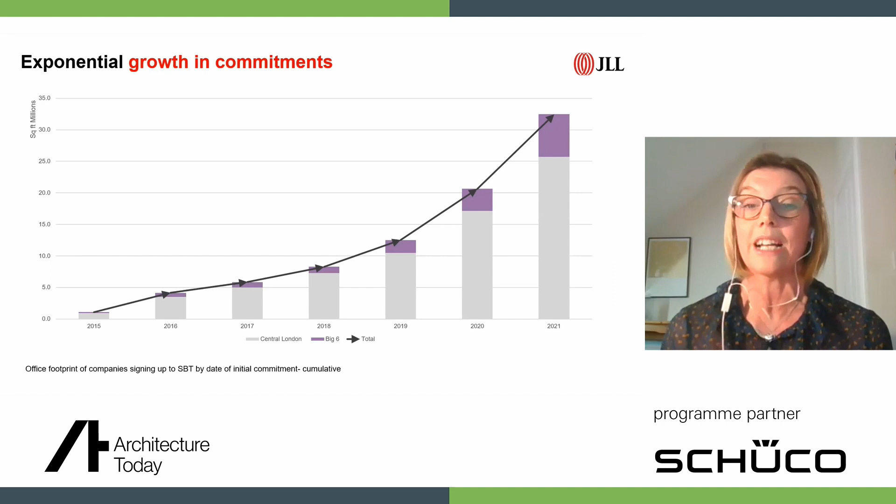And each of those companies obviously has a different time frame, but a lot of those companies have a 2030 ambition. So what that means is those companies actually have to take action now. When we look at the footprint of those companies, most have a lease expiry between now and 2030. What this means in real terms is that property teams in those companies will be thinking about the implications of their sustainability ambitions that need to be taken over the next few years.

And when we looked at those companies who'd already signed up to science-based targets, over half have also declared ambitions for their business to be net zero carbon, for example. So this places more pressure on the real estate team to help deliver those ambitions. So the real estate teams will be putting together a plan for their estates and looking at the additional investment needed to deliver on this.

We've done some analysis on their footprint, and you can see from the graph that of the current buildings those companies occupy, only 43% of space is currently in assets rated BREEAM outstanding or excellent. Anything below that is unlikely to meet the wider corporate needs. This suggests that leasing a more sustainable or higher rated BREEAM building, or a net zero carbon office, will be one way for real estate teams to help their companies achieve ambitious sustainability targets.

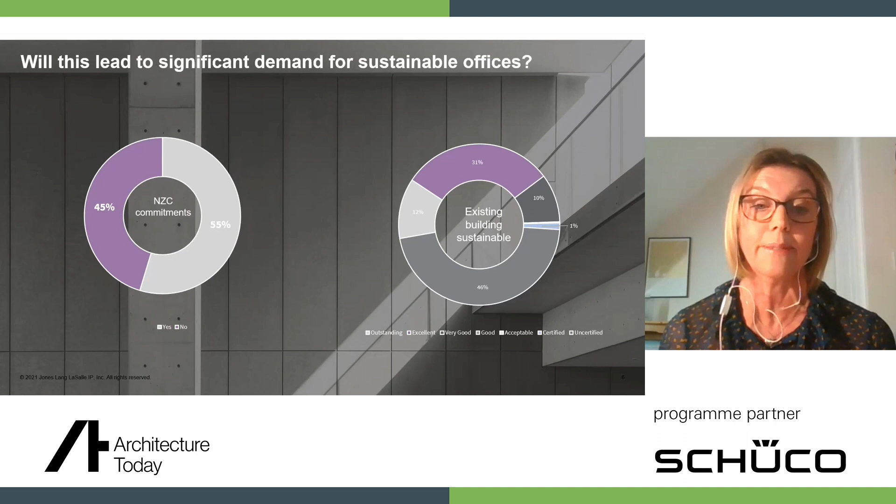Let's move on and consider the actual supply of sustainable office buildings. We're aware there's a plethora of sustainability rating systems in operation, but for this analysis we're just looking at BREEAM rated buildings. We've used data from the BRE, the Building Research Establishment, and estimate that just over 10% of the built office stock in the Big Six and Central London has a good to outstanding BREEAM rating.

Few buildings are now completed without a BREEAM rating, but to date few landlords have actually pushed on to achieve that top rating, with only a handful of outstanding assets available in these cities. These are illustrated on the right-hand side of the screen.

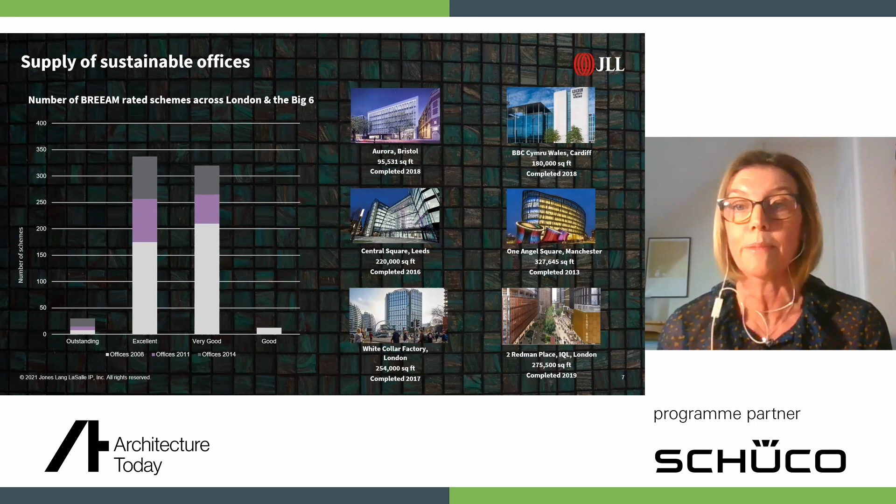As you can see from the graph on the left-hand side, most schemes have actually gained excellent classifications, and that's been pushed now through local planning guidelines, which set minimum BREEAM ratings for new developments in their markets. So about half of buildings in Central London and the Big Six have achieved an excellent rating. Although it's important to note that half are actually assessed under the 2008 rating system, so they're not directly comparable to buildings assessed much later. That's a really important point to bear in mind.

But of course, the next wave of sustainable buildings is going to go beyond BREEAM and will be targeting net zero carbon. Net zero carbon is an umbrella term often used in relation to the built environment, and it's essentially a framework to achieve that ambition.

Momentum is building to reduce carbon within the built environment, and we've seen several assets staking a claim to be net zero carbon in operation. But the challenge to reduce embodied carbon to zero is much more difficult. However, it's a challenge that must be met, given that in a typical new office building the structure can represent over 50% of the initial embodied carbon, according to the UK Green Building Council.

There are only a handful of net zero carbon buildings currently built, including 100 Liverpool Street and 80 Charlotte Street in London. And there are currently no net zero carbon buildings fully available which meet the UK Green Building Council's framework for both embodied and operational carbon.

There are several net zero carbon buildings currently underway, such as EQ in Bristol, Wellington Place in Leeds, and the Forge in central London. Developers are now starting to wake up to this opportunity, taking their commitments to more sustainable real estate much more seriously. But these buildings will take some time to come to market, and with momentum building around demand for net zero carbon, there's a real clear gap between demand and supply.

But how do sustainable buildings perform? We know from talking to developers and investors that increased upfront costs can often act as a barrier to the delivery of sustainable office buildings. But when we look at global studies, they tend to show that sustainable buildings have higher rents, quicker leasing, and better longer-term performance than less sustainable buildings. So we set out to consider whether that trend was evident across the UK.

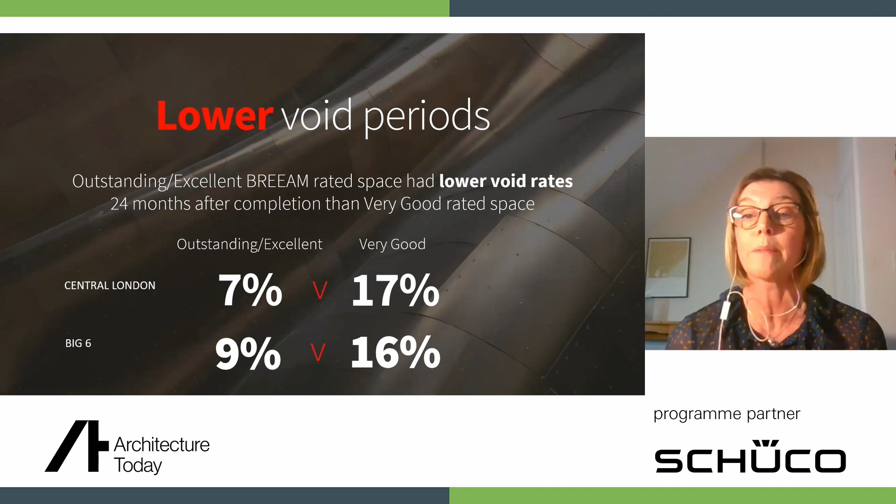I think it's also worth noting that many of these factors are already taken into account in sustainability ratings. And we fully expect that there will be an increasing prevalence of corporate mandates towards sustainability, and BREEAM is going to become a much more prominent deciding factor over the next few years. But we're also going to see other accreditations rise up the corporate agenda, and we'll see more and more developments targeting schemes such as NABERS, WELL, as well as obviously striving to be net zero carbon.

This focus on BREEAM ratings is borne out by another survey that we did. It's called our Responsible Enterprise Survey. And that showed that of the occupiers that we interviewed, 45% already prioritised building credential certifications. And another 40% expect to implement this by 2025.

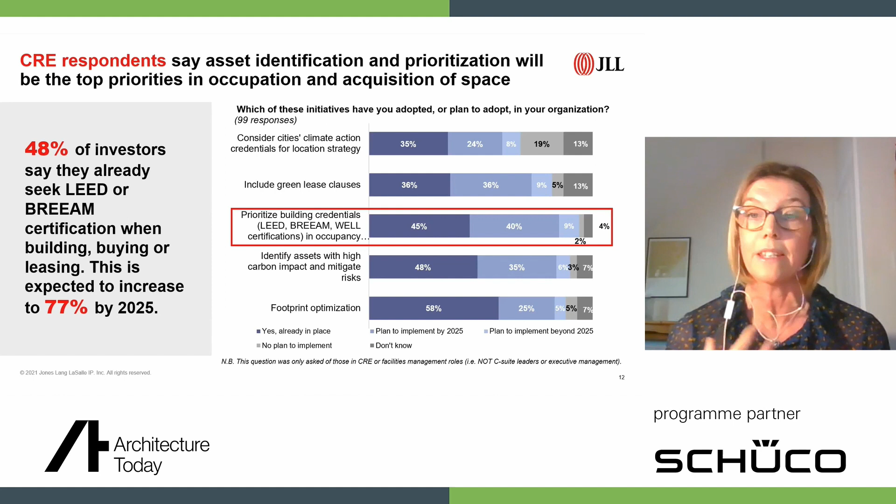The slide also shows the investor focus on sustainability certification. And again, you can see on the left-hand side of the screen, 48% of investors that we interviewed said that they already seek LEED or BREEAM certification when they're looking at building or buying a new office development. And again, you can see that the pace of change is expected to increase significantly by 2025.

The increasing focus for investors is really being borne out from a practical level. And we've also seen that through a number of the other surveys that we've conducted. We do an annual investor survey, and 2 years ago, we asked the question, what are the long-term trends that will have the greatest impact on the UK real estate?

In 2019, it was really interesting that sustainability was actually at the bottom of the list, with only 7% of respondents including it. Fast forward just 12 months to 2020, and sustainability had moved to the top of the list, with 70% of respondents including it. That's a dramatic increase in just one year.

So what we're seeing is that investors are clearly starting to recognise the potential impact on their portfolios from sustainability. This is also clearly illustrated by the latest survey we did, shown on screen. More than two-thirds of respondents said they will give sustainability a higher priority than they had over the last 12 months. Those institutions are focusing on 2030, not 2050, which is effectively just one property cycle away. That could mean we see many stranded assets within the next 10 years if they don't meet those sustainability criteria.

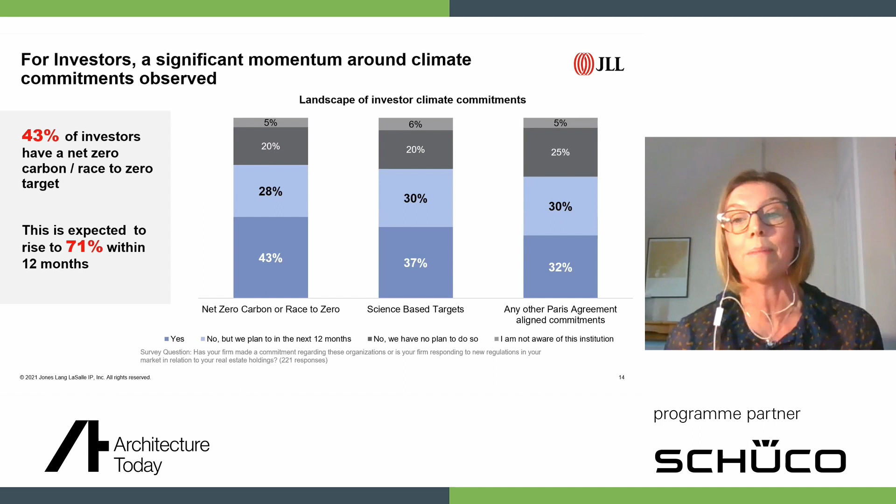Investors are also making commitments. What we're showing on screen is the number of investors that have made net zero carbon commitments, science-based targets, or other Paris-aligned commitments. We can see that at the moment, just under half, 43% of investors, have made that commitment to net zero carbon so far, and it's anticipated to reach over 70% in just 12 months. This shows the tremendous focus and momentum we're seeing in the marketplace, although commitments are the easiest part — following up is much more difficult to action.

So just to conclude and summarise, what I'd really like you to take away from the presentation today is: number one, let's be crystal clear that there is a real value differential in delivering sustainable office buildings. Number two, there really is a wave of occupiers ready and waiting for net zero carbon and more sustainable offices — occupiers who have big targets to meet and who are only going to get more demanding. Finally, we think there is a real premium opportunity for net zero carbon buildings if you move fast, but the conversation will increasingly move towards a brown discount as low performing buildings are increasingly rejected. I hope you found the presentation interesting, and thank you very much.

That was really interesting. We've had some questions coming in. One of them says many office buildings achieve the BREEAM Excellent rating — is that score sufficient to hit the UK net zero strategy targets?

The issue we have at the moment is that BREEAM is the only rating we do have. I think it goes a long way to focusing the industry's attention on sustainability targets, and it's something people understand. I think the problem with BREEAM ratings is that's just how buildings are designed — it doesn't necessarily translate into how buildings are actually occupied, and I think that's going to be one of the critical points moving forward for us to reach net zero carbon, actually how we use our buildings moving forward, which is why new ratings such as NABERS will be more relevant to the industry as we move forward.

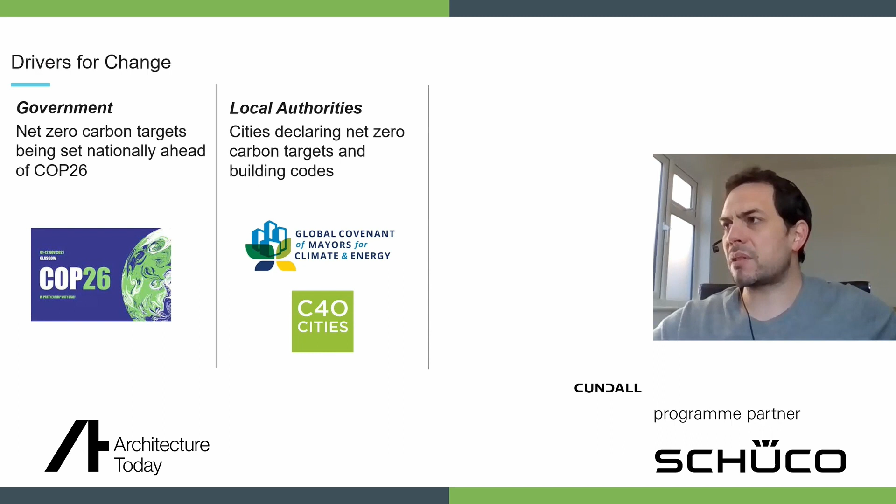Over the last couple of years, we've really seen a number of drivers for net zero carbon from central governments around the world, especially the UK, declaring a climate emergency back in 2019, followed by pretty much all local authorities declaring their own emergency and setting even more ambitious targets than the central government. Then there's been a significant groundswell of public action and media attention around net zero carbon, which was intensifying before COVID. We expected COVID to have a bit of an impact, but to be honest, the public response to the climate emergency has kept pace and has really been pushing central governments and organisations. So we're seeing huge drivers across different sectors and different areas for decarbonisation.

In terms of the built environment, we're seeing similar drivers for change from investors, developers and occupiers, working with a number of institutional landlords where occupiers are setting their own science-based targets and net zero carbon strategies, and saying that if the buildings do not meet their requirements and help them hit their targets, they will be moving. So there's huge pressure on landlords to decarbonise their assets or risk voids or reductions in rents.

Similarly, we've seen a huge movement with developers. Most developers have now committed to net zero carbon commitments via the World Green Building Council or Better Buildings Partnership. This requires them to achieve their net zero carbon standards in a certain period and produce roadmaps. The main reason they're doing this is partly because they want to and have their green aspirations, but similarly, funding is being heavily linked to ESG requirements and net zero carbon.

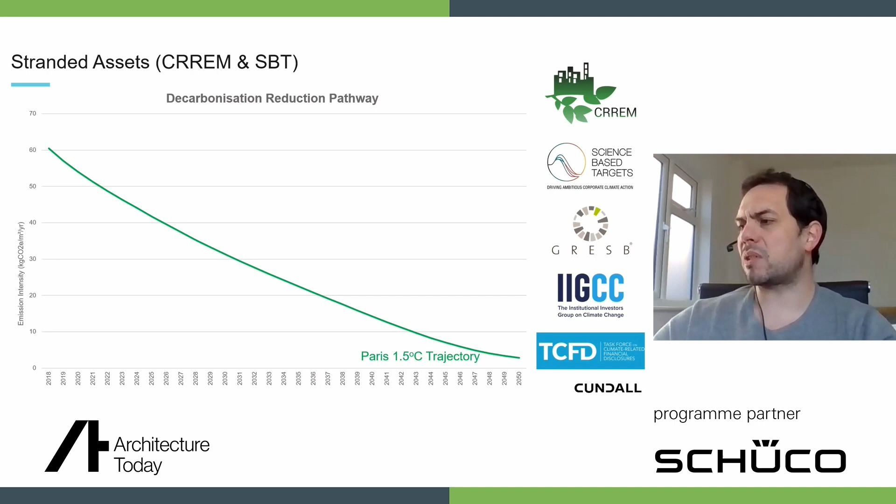A lot of investment organizations are mapping their assets against this CRREM trajectory, going through their entire portfolio to understand where their current performance is, which is generally for most newer buildings below that green line, the trajectory. But if they do nothing to that asset, it will eventually get to a point where it crosses the green line, which is known as a stranding event.

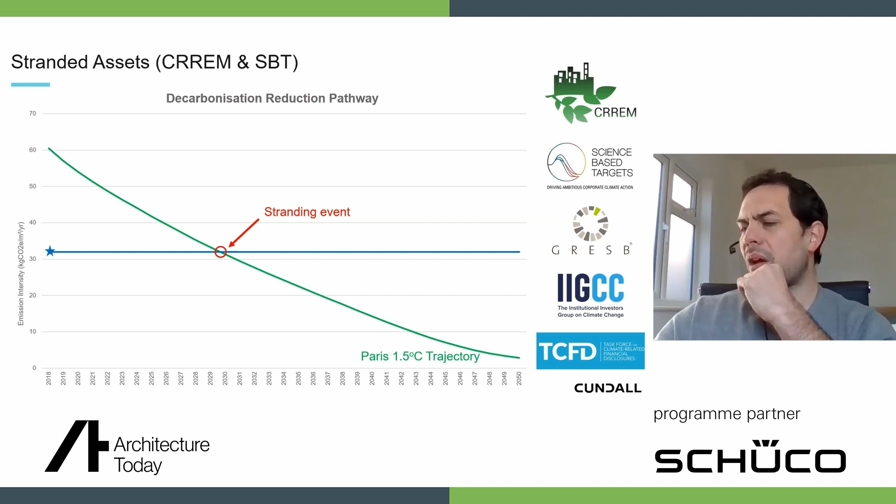This doesn't have any physical impact on the building, but what this is starting to do is put the asset at risk of devaluation. Large institutional investors are starting to look through that to see what retrofit and action is needed on assets and portfolios to reduce that stranding risk, or move that stranding risk out further, with the aim of ultimately aligning to a 1.5 degree trajectory.

They're doing this to future-proof themselves against potential carbon tax and levies, and also to meet their ESG requirements. There's no requirement to do it now, but a lot of organizations are doing it as part of their ESG, but also the main reason is to de-risk the financial implications that are likely to come from central governments, the European Union, and carbon taxes as they start to be introduced over the next few years.

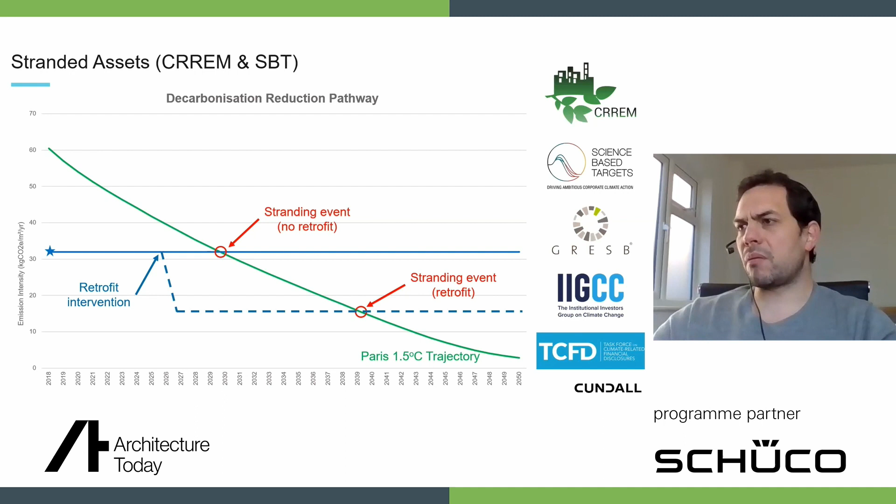So what does this mean for buildings? Well, the first thing we have to do is look at definitions, and net zero carbon buildings has really been accelerating in understanding and implementation over the last 2 years, and we've really started to see the industry come together and define what we mean by net zero carbon buildings.

One of the key differentiators from carbon neutral, which I think is pretty much standard now, is that there's a clear understanding that carbon neutral just means you work out your carbon emissions and offset down to zero with removals. There's no requirement to achieve any standard before you do those offsets, you can offset as much as you like, whereas net zero carbon requires you to align your emissions to a 1.5 degree scenario before you remove. So you need to hit stringent targets around operational energy and embodied carbon before you go to those removals.

Most developers and most of the industry are setting their targets and aspirations around net zero carbon. A few developers have actually gone a step further and are looking at absolute zero, meaning they're looking to get down to zero without removals, which is possible with things like operational energy at the moment with renewables, but for embodied carbon it means a complete shift in the supply chain and working with your supply chains. It's going to be extremely challenging, but extremely interesting how those developers get on with those targets.

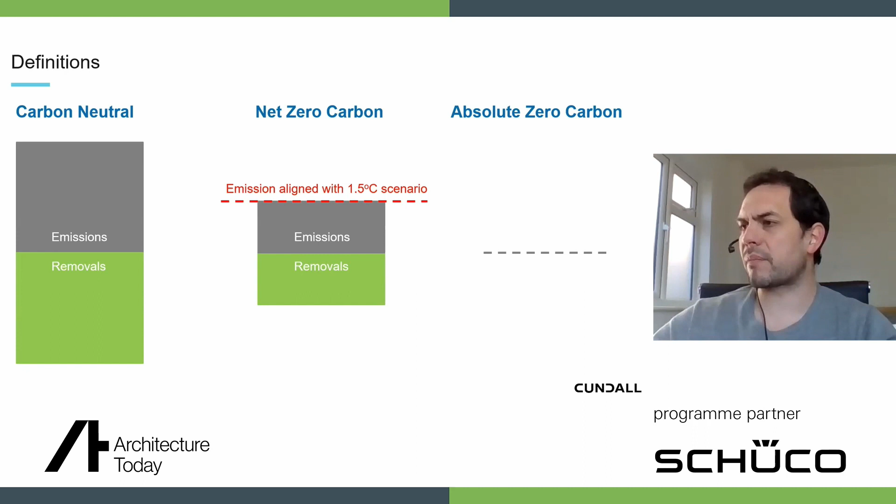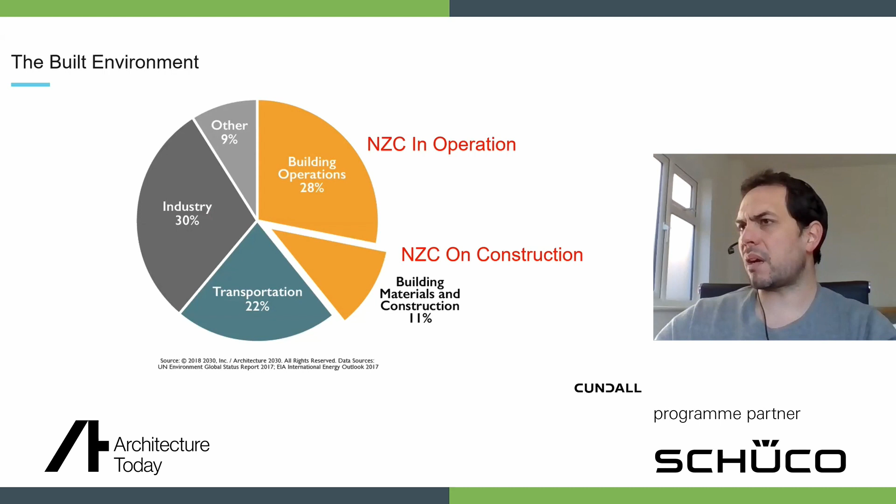So there's two key requirements when we're talking about the built environment: we have net zero carbon in operation, which is a significant proportion of the UK's emissions, and we also have net zero carbon in construction, which is rising in importance with the precedents and trying to get regulation on embodied carbon. Both of these over the last couple of years have had their definitions refined, and we now have clear definitions from the Whole Life Carbon Network, LETI, and the RIBA for both operational energy and embodied carbon.

So for operational energy, there are four main requirements. One is that no fossil fuels are used on site. Energy use is minimized in line with those Paris-proof targets. That meets local energy targets, which in the UK is generally UK GBC and LETI targets. And then all energy is generated from renewables, either on-site or off-site, using power purchase agreements and green tariffs, which again can be problematic.

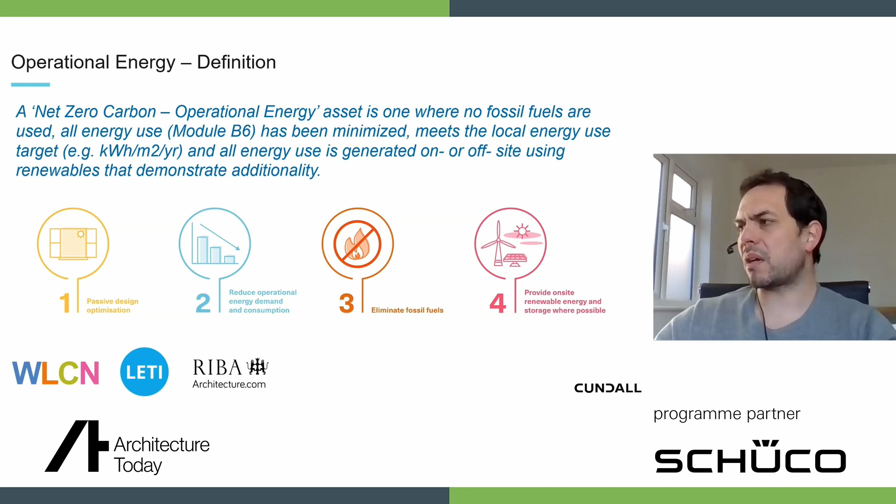In terms of net zero carbon on construction, the focus is on upfront embodied carbon. So it's about reducing the upfront embodied carbon associated with the construction, and then offsetting down to zero, but only once you've met the targets.

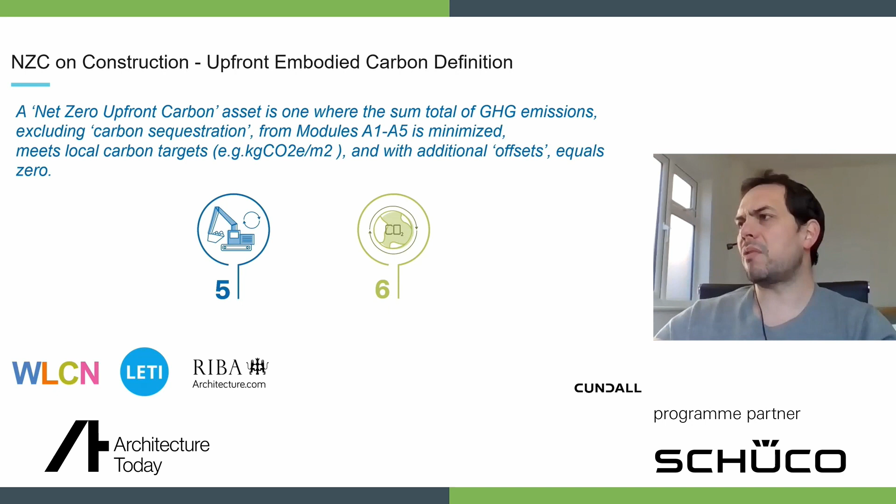So what we've seen a lot of schemes do is offset their carbon footprint of the upfront embodied carbon, but if they don't meet the intensity target, then they can't claim to be net zero carbon - they can only claim to be carbon neutral. This has to be considered in conjunction with whole life carbon, because we don't want to be making decisions which might be low embodied carbon on day one but have huge carbon implications later. So really trying to define the difference between upfront embodied carbon, which can be reported fairly accurately now on practical completion and is the focus of where we want to be going, but being mindful of whole life carbon and looking at calculations to achieve those kind of standards.

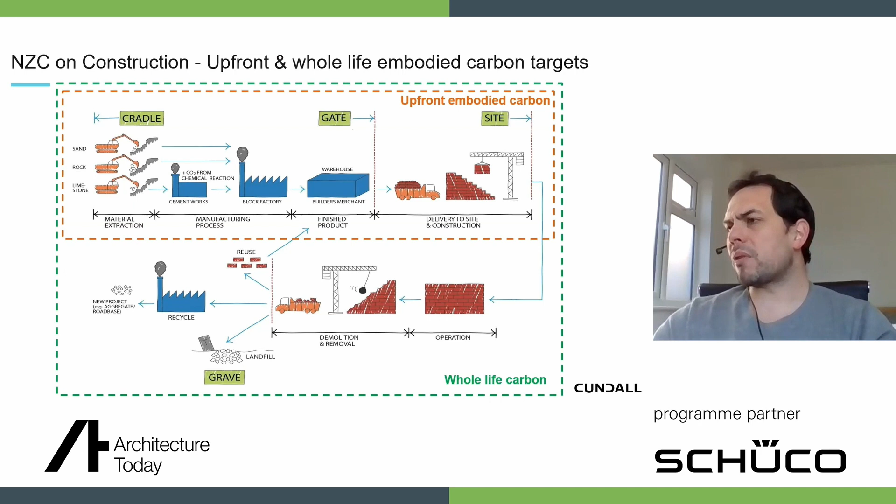What's recently been published and we've been involved in is a consistency project. So obviously over the last few years, we've seen LETI, the RIBA and a few others come out with carbon targets. They cover slightly different things, with LETI focusing on upfront embodied carbon and RIBA looking at whole life carbon. They've now been aligned and starting to put together sliding scales, like EPCs, of what is good and best practice.

A number of schemes are starting to report their carbon emissions against these, with the best kind of new build schemes generally achieving upfront embodied carbon around the CB band, which is extremely challenging, but it's going in the right way. To get to the LETI 2030 targets, we're only really seeing projects which are doing significant retrofit and refurbishment getting anywhere near those kind of levels.

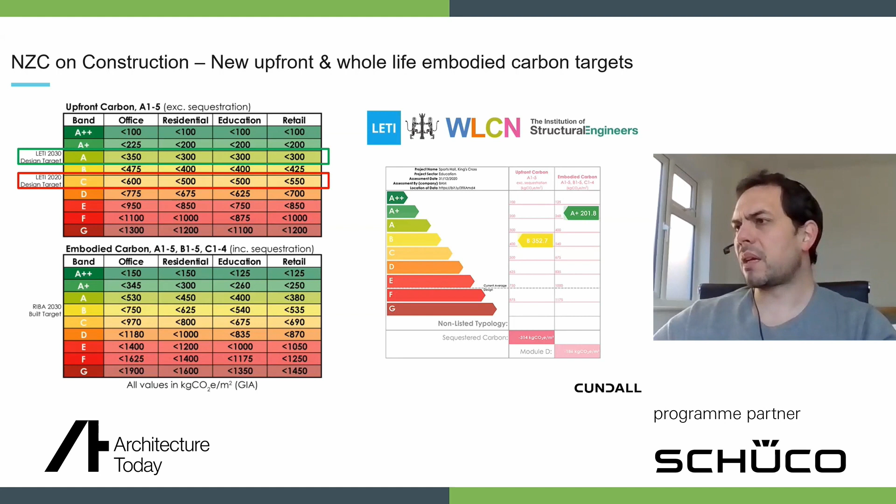In terms of operational energy, just looking at the commercial office sector, this is a good example which shows the level of reduction we need. So typical office buildings in the UK are at an energy intensity of around about 300 kilowatt hours, with the best practice 25% being closer to 200.

In order to get down to the Paris-proof aligned targets, we need to be closer to kind of 70 kilowatt hours per meter squared, which is a significant step change, and we need to push as hard as we can. It's not about tweaking and fine-tuning buildings, it's about systematic change in the way we design and operate those buildings going forward.

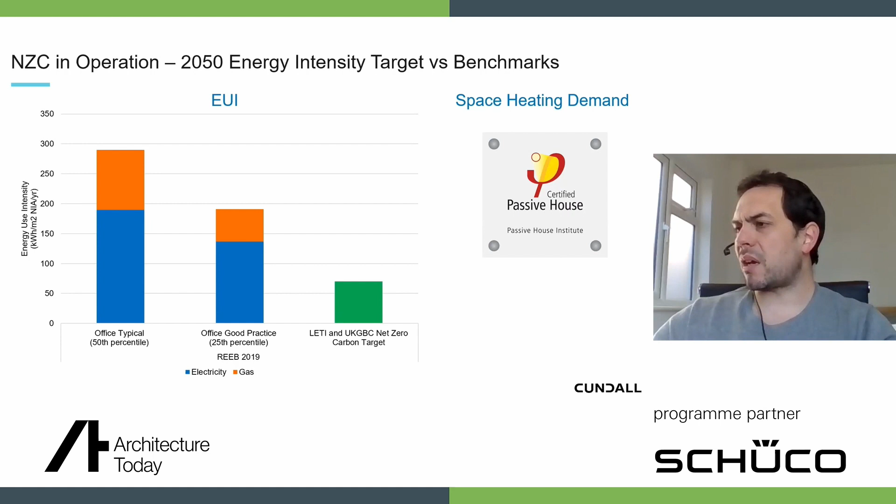To get us to those targets, the UK GBC and a number of other institutes have put together interim step targets. So you can see here from the UK GBC target for offices that we have whole building targets. They've broken that down into base building and tenant targets, and then set those every kind of 5 years, improving.

And pretty much all the buildings which you see in the media claiming to be net zero carbon in operation are hitting the interim targets. There's pretty much no buildings at the moment aligned to the Paris-proof targets. Most will be net zero carbon to a date.

So if you build a building that is net zero carbon meeting the 2030 targets in 2025, it's only going to be net zero carbon for 5 years, and it will only stay net zero carbon if retrofit works are actually completed.

So when you're designing a new building, we need to be getting as close to these Paris-proof targets as possible. And if we can't achieve the Paris-proof targets, we need to be setting a pathway so that it can be improved over time. That might be improving the ICT in the building, or tweaking some of the operational parameters, or changing our MEP after 5-10 years or longer.

This is linked to the Australian NABERS scheme, which has come over to the UK, with 6 stars being roughly equivalent to the Paris-aligned targets. And there aren't any buildings which at the moment are targeting or moving towards a 6-star. Most of the front-running buildings that we're looking at and reviewing are kind of around about the 5.5 star, and probably won't achieve that level of performance. Will probably be coming in closer to 4.5 star at absolute best. So we still have some work to do.

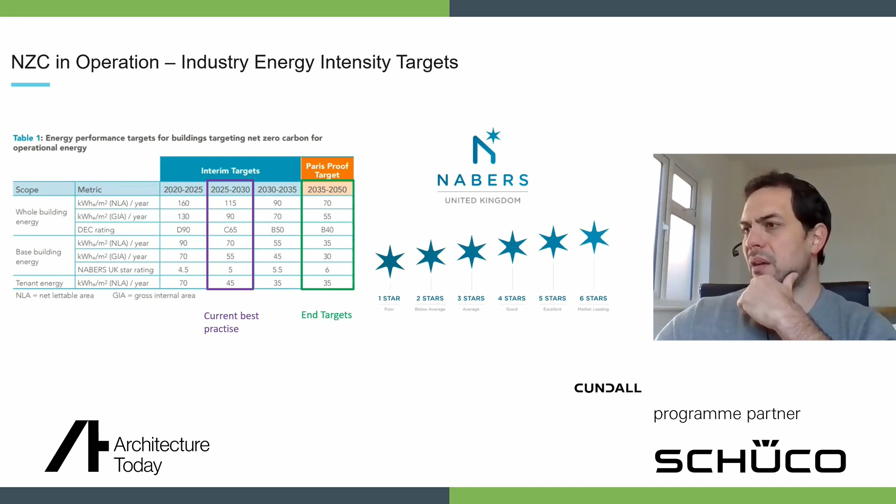What's very interesting about the step targets is if we go back to the CRREM trajectories we're talking about, what that basically means is if we aim for an interim target, we are still going to have a stranding point in the near future.

So the further we can go down that step trajectory, the stranding point will be pushed out, and the less retrofit work we have to do.

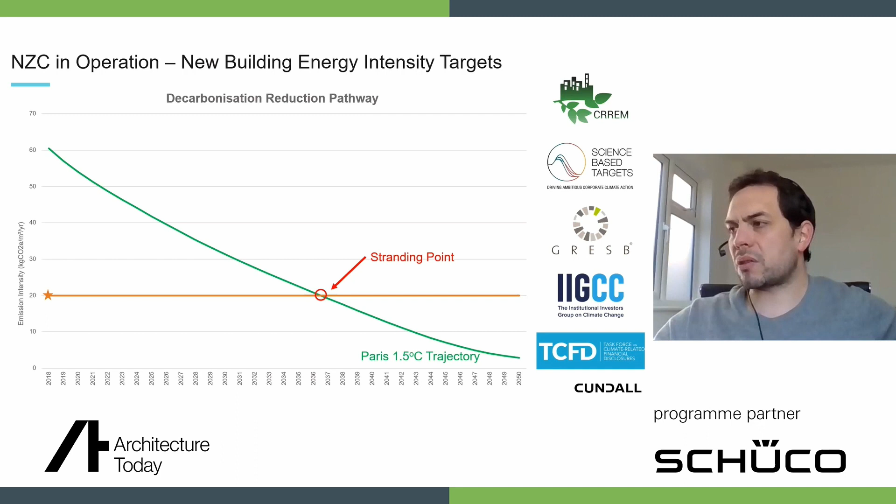One of the biggest discussions we have at the moment is the cost of net zero carbon. We know there is a premium for net zero carbon buildings. We've seen from the UK GBC reports that this can be between 5 to 15%, but you need to be careful when looking at that cost, because you need to compare the whole life cost, not just the upfront cost.

So if we take a building that we need to get to net zero carbon in operation, adding that 10 to 15% pushes the viability of the project. But if we don't do that uplift in the original cost, then we will need to do retrofit works to comply with stranding, because all buildings will need to be net zero carbon by 2050 to meet government targets. The cost of getting to net zero carbon will be significantly greater doing the works later than now, so you'll have increased operating costs and significant costs to pay.

What we recommend is that people really focus on the fabric, because you don't want to be recladding and scaffolding a new building only 10 to 15 years after it's built because you haven't gone hard enough on fabric performance. It's really important that you get the fabric right, and have a strategy around plant and equipment replacement, phased over a number of years. It's a false economy just calling it an uplift - that uplift needs to be balanced on a whole life assessment.

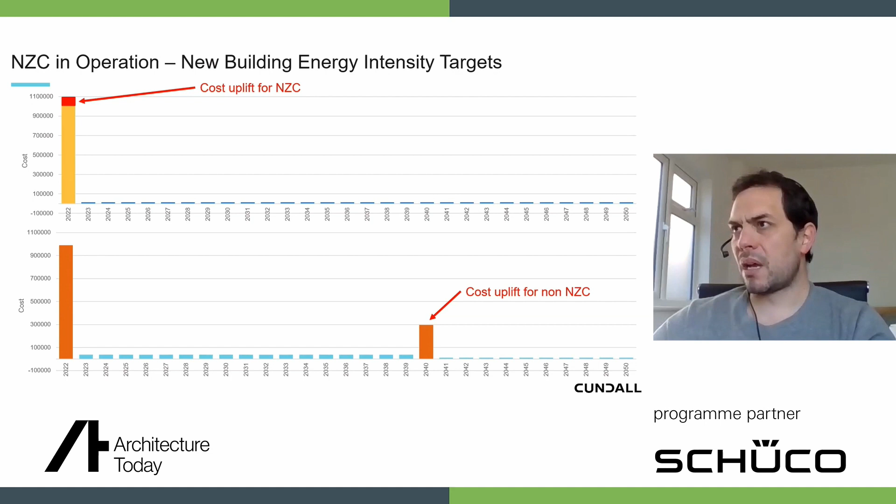Just to finish up with a few case studies. This is one project which has done that - the Eden project in Salford, Manchester, which is looking to be net zero carbon in operation. It's been designed to be NABERS 5.5 star, and is just going through the independent design review process at the moment, very close to the 2030 targets, with an aspiration that the fabric achieves near passive house standard.

So fabric changes won't be needed. The changes from moving to the 2030 targets to the 2035 targets will just be fine-tuning the operating conditions with the occupiers. So it will achieve very high standards and then have a pathway for moving to net zero carbon in the future.

It's not just being done at building level. This is another project we're working on in Salford, Manchester - a £2.5 billion redevelopment of Salford Crescent, where the master planner sets individual net zero carbon targets for individual plots and infrastructure, looking at both embodied carbon and operational energy. It's got a significant residential proportion using passive house.

One thing we're seeing on this, and across projects, is the effect on land prices. Where we're developing schemes with local authorities, land prices are being affected. Where they're setting ESG and net zero carbon requirements, the viability of schemes is under pressure, and that pressure is pushed through to the actual land value. Some local authorities have reduced land values significantly if schemes meet their ESG requirements, partly funding those requirements for the project.

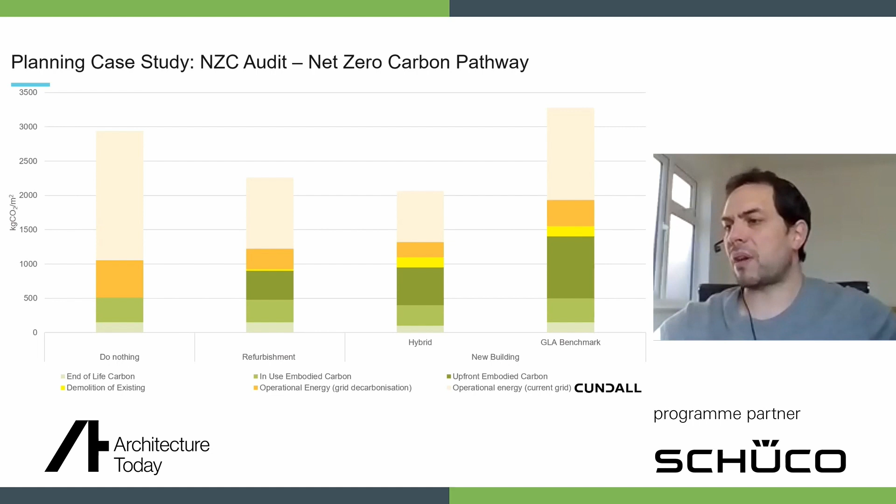Finally, and most importantly, is existing buildings. So existing buildings will make up 70 to 80% of the buildings that are operating in 2050. So we need a significant program of retrofit to existing buildings.

So we're going into quite a lot of buildings, looking at the existing performance, and then looking at where we want to get to in terms of net zero carbon performance.

Looking at a number of interventions like installing heat pumps, removing fossil fuels from the building, improving fabric, introducing mixed mode and natural ventilation solutions, improving the HVAC systems, and a significant proportion is associated with behaviour change.

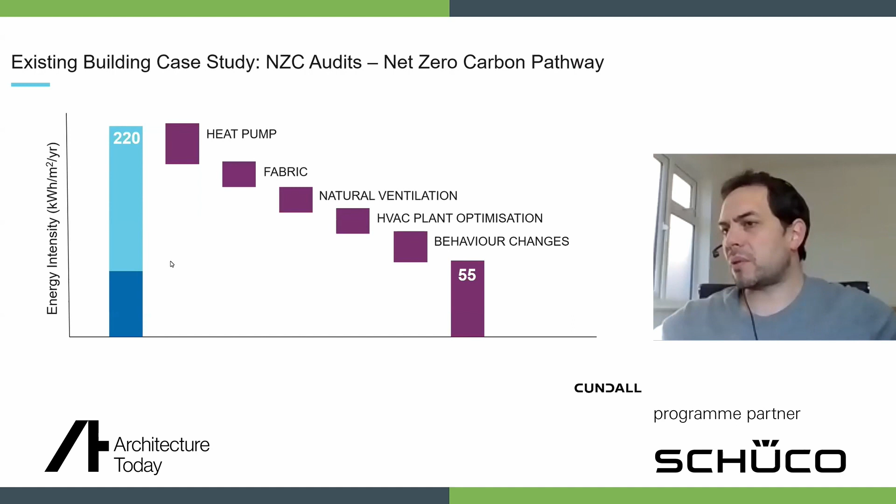Then what we're doing with those measures is mapping them onto the CRREM trajectory or a science-based target trajectory to see where the asset is, and then demonstrating through those interventions how we push out stranding events. So the risk of that asset devaluing or having void periods is reduced.

And what we're seeing from a lot of clients is when they're doing technical due diligence to acquire buildings, they're looking at stranding events, they're looking at the cost of moving those stranding events out and improving the building performance. So there is definitely the business case now coming through, both in terms of retrofit, acquiring buildings, but also in terms of planning and new buildings themselves.

So we're definitely seeing the market pressures around moving towards net zero carbon. So that's the end of my presentation. If you've got any questions, please let me know.

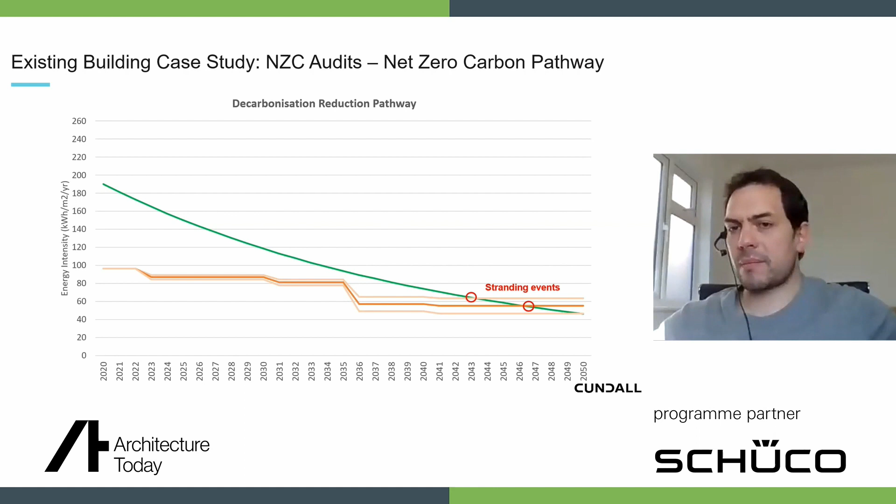I was really interested you talking about those graphs showing the way that stranding events were going to move, or wanted to move forward to be further away in time from where we are now. How much do you think that existing buildings will be stranded? Because don't regulations normally apply at any point to new build rather than to buildings that are already there?

Well, this is probably the most interesting shift change we're seeing. So, as you said, the building regulations, EPCs, BREEAM, all look at design and buildings on completion. So they're not very good measures of operational energy.

So what the government are looking at is mandatory energy performance of buildings. DEFRA have done some consultation on this. And what they're potentially looking to introduce is a mandatory reporting system like DECs, so every year you take your gas and electricity meters and then you'll basically report your performance.

They're looking at large commercial offices to start with, but they'll probably introduce it for most other types of buildings. What would be interesting is they'll start with every year you've got to disclose your performance, but they'll start putting that in a league table, and there'll be a point where they'll start introducing fines for being below a certain level. So they'll be looking at real life performance.

In reality, those fines would be fairly small. We've seen that with the other European Union energy directives, they're generally very small amounts. But what will happen is once there's a league table of office buildings, no developer, investor or landlord is going to want to have their buildings towards the bottom of that league table. So there'll be a competition to move their buildings up towards the top of those league tables.

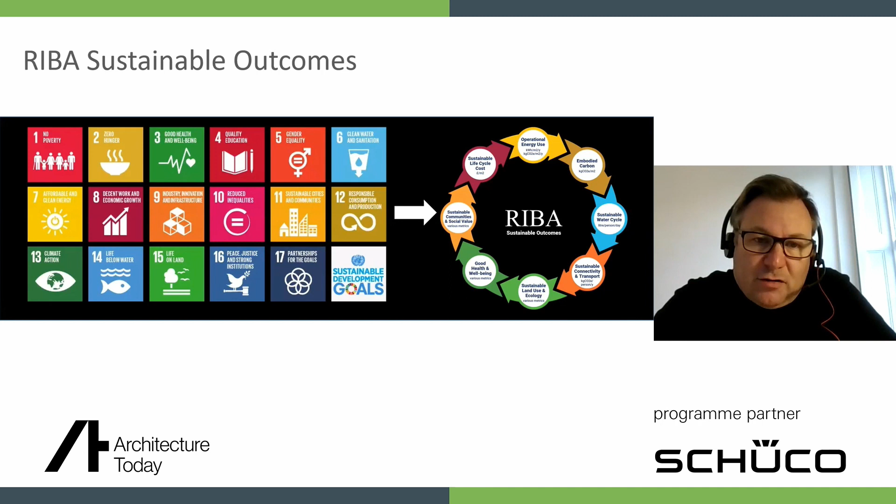All the latest RIBA guidance that's been released over the last couple of years embraces a whole life cycle model of sustainability. And equally, the guidance also aligns with the UN Sustainable Development Goals, all 17. But what we've done is distilled this down to 8 sustainable outcomes that we can measure and manage on a busy project with busy project teams.

So just taking a moment to go over those sustainable outcomes, we've got the 8 along the top there. We've got net zero carbon, which is operational, and then we've got net zero embodied carbon. Together they're considered the whole life net zero carbon.

Then we move on to the sustainable water cycle, sustainable connectivity and transport, sustainable land use and ecology, good health and well-being, sustainable communities and social value, which again we'll come back to later in this presentation. And then finally, we've got the sustainable life cycle cost, which is the subject of this talk. So we've got our 8 outcomes, which effectively is the DNA of a sustainable building.

But underneath that, we've created about 24 key metrics that one could measure and manage throughout a project. These are really up to the client and the design team to choose, and maybe add more depending on the type of project. But we feel this is the baseline for actually achieving a whole holistic sustainable outcome for the whole project.

So just taking it very quickly, I'm not going to go through everything, but looking at the key metrics, we're talking about a 60% reduction in operational energy use, which is part of the RIBA 2030 challenge. And then we offset that remaining operational emissions.

From an embodied carbon side, it's about retrofit first, and we try to aim for that 50% reduction in embodied carbon from benchmarks, and then we offset that 50%. Sustainable water cycle, again it's trying to aim for that 40% reduction, and those 3 together are really the RIBA 2030 challenge. Then moving on to sustainable connectivity and transport.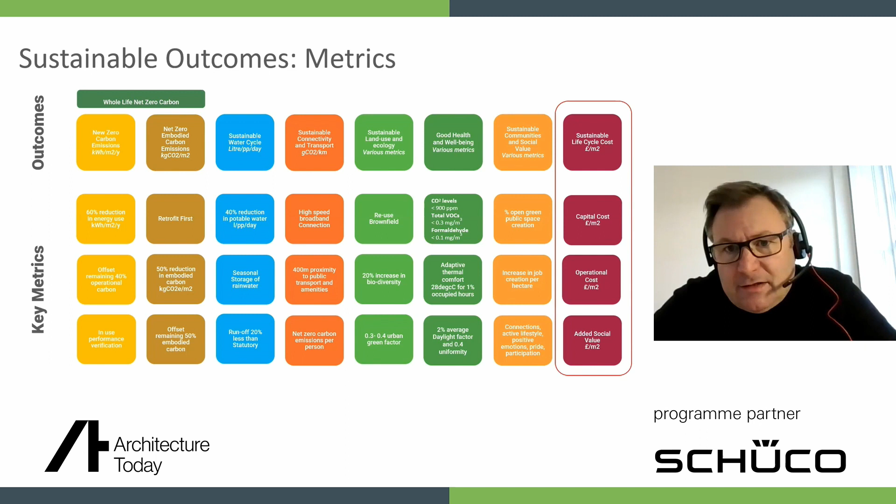And the final one, which we're going to talk about today, is this sustainable life cycle cost. So I'm going to move on to this.

What do we mean by sustainable whole life cost and value? The graphic on the left is really a business model for architecture and buildings. It's balancing cost and value, and obviously our clients are looking for more value than cost over the whole life of the project.

And effectively that's the same on this micro level. The question really is, can we afford to enhance our buildings to create better sustainable outcomes? What's the cost of that and what's the value?

So what we're looking at is the cost: the capital cost, the capex, and the opex, which is the operational cost of the facility. Then if you add all the operational savings in terms of energy and maintenance costs, plus the benefits of enhanced well-being and productivity of the inhabitants, as well as the rental premium, which we'll talk about later, and then add that wider social value on top, does that outweigh the balance of the cost? I believe it does, and we're going to talk about it in a minute.

Now the graph to the right is a seminal graph, back in 2005. I've been using it for 17 years, and I've been trying to get our cost consultant colleagues to redo this graph for 17 years, but we haven't really done it yet. So I think it's a challenge to anybody listening here to attempt this, and we need the evidence to support this work.

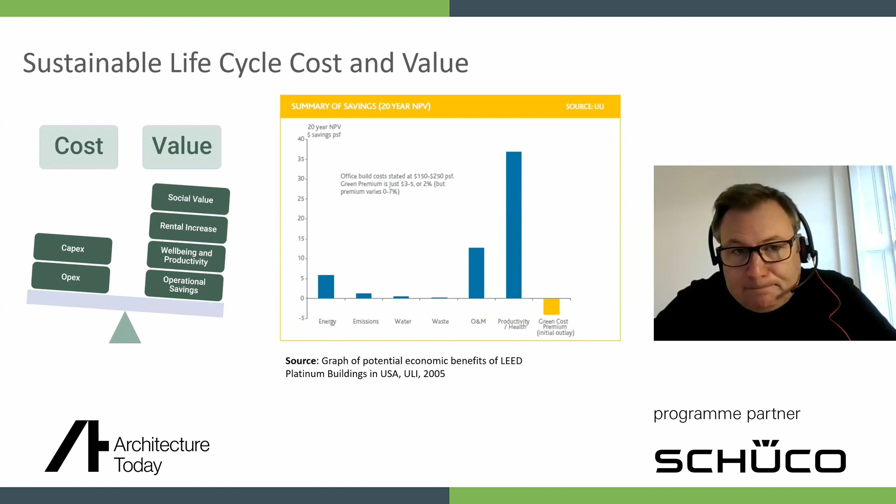So let's look at the evidence of where we are now in terms of the UK. This is a study done by our engineering colleagues, which is a great graph. It plots out all the best performing low energy buildings in the UK, and you can see there's quite a lot there.

And what it sets is this target where it's 150 kilowatt hours per square meter for a good practice modern office. The previous benchmark was about 225, but obviously there's variability in terms of how the building is designed and then how it's run.

But effectively you can see that the trend is moving down in terms of the newer buildings, towards the right-hand side of the slide, and the trajectory is down to around about 100 kilowatt hours per square meter.

Now, just to point out, this is actual real data measured, and this is actual full operational energy, regulated and unregulated energy together. So it all aligns with our RIBA targets.

And we can see there the target we set for the RIBA challenge, and also LETI has actually set that as well, is 55 kilowatt hours per square meter. So we can see there's a couple of buildings that have actually achieved that, or are very close to achieving it.

The trajectory is that we're really quite positive we can get there with everyone's support, and then we need to upskill the profession to that level. That represents a 60% saving from a typical office now, and maybe about 80% from the previous one in terms of 225. If you monetize that, it's a huge amount of savings for the client. And the energy costs, as we know, are going to double this year, so that saving is going to be even greater. That's the first level of energy savings.

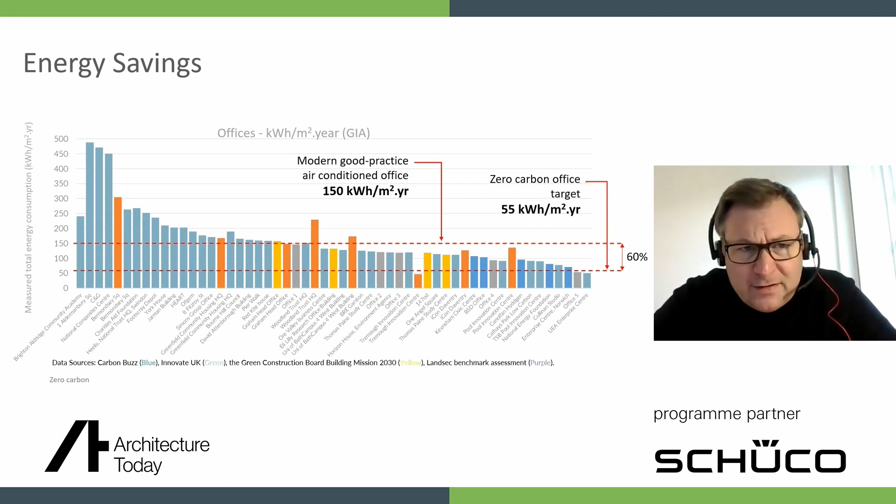Moving into maintenance, this is a bit more tricky. There's limited research on the cost of maintenance, but the table I'm using is from the Usable Buildings Trust, by Bill Bordass and Adrian Leaman. They've written some great papers on this in the past, and the concept they talk about is unmanageable complexity. What they mean is you create a very complex building with lots of BMS, lots of mixed mode air handling units plus natural ventilation. The more complexity you put in the building, it comes to a point where it's almost unmanageable to try and manage that building.

In this graph you can see type A, which is effectively this type of building that has got everything in there - mixed mode, mechanical plus natural, all BMS controlled. It's effective when it works well and has greater functionality, but it comes with a cost. We've got to be very careful about throwing too much technology at the problem. The corollary is type B, which is probably where we all need to be - taking a step back and thinking about an effective approach. It can be low impact and often small scale, but we need to scale this up.

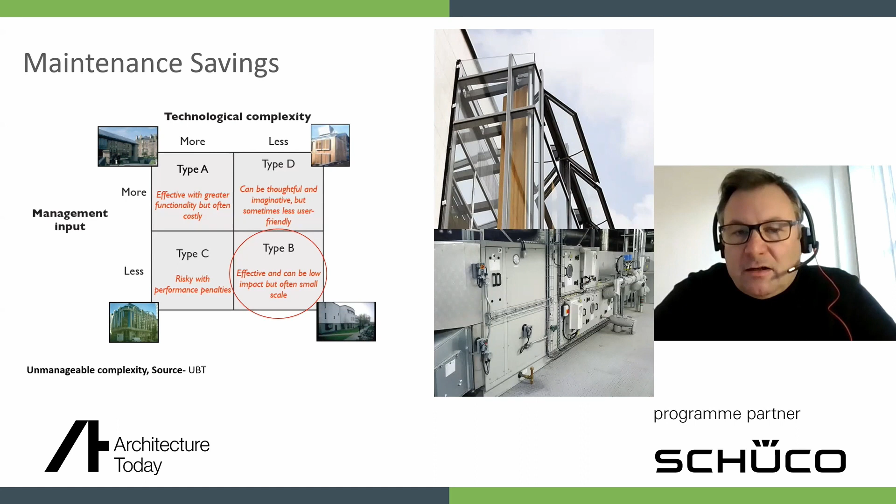The building they're referencing here is the Elizabeth Fry building in Norwich, and the building performance evaluation team have been tracking it for 30 years. It is the best performing higher education building in the UK for over 30 years in terms of energy plus occupant satisfaction. And that's actually a thermodeck, naturally ventilated building - very simple. So this is really what we're saying: to get operation and maintenance savings, you've got to think twice about very complex buildings in terms of management.

An example of what happens with complexity in terms of energy cost as well as maintenance is this study done by Buro Happold a few years ago - they looked at one of their own buildings that they designed, came in and analysed it. This was the daily cycle, a year apart, as part of a building performance evaluation, or POE. You can see the daily cycle there.

Normally, when it's shut during the base load, it's quite high, and then there's a peak during the day, peaking just after lunch, and then it tails down as people leave. Then there's people cleaning, and it gradually goes down to its base load. But they discovered that with fine tuning, they could get better efficiency - they managed to reduce the base load at night. It's almost like a heart monitoring device for a building, where you try to get that base load as low as possible, and then top down the peak as well.

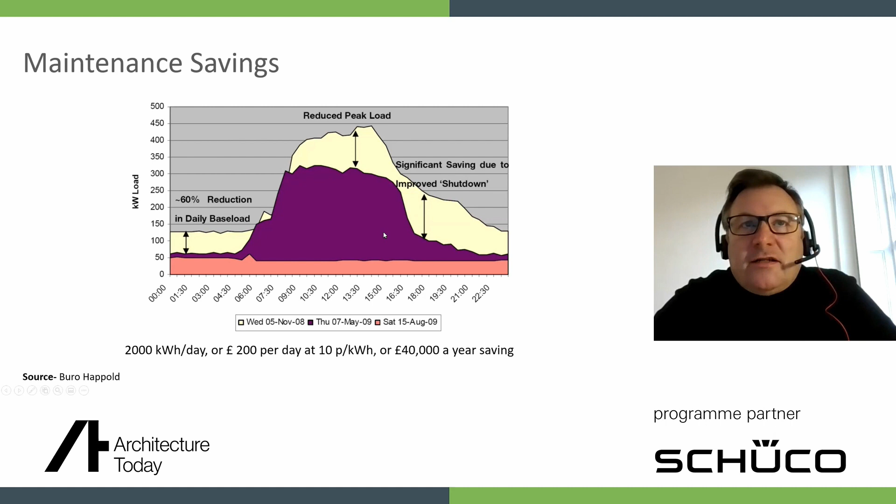So you can see there's an enormous amount of savings - everything in yellow is saved, which equated to about £40,000 a year, and that's on 10 pence per kilowatt. Imagine when you double the price, then you double the saving as well. I think that's the aim - we're trying to get that pulse of the building as low and as accurate as possible, with the base load as close to zero as possible.

So moving on to health, well-being, and the link to productivity.

Again, I'm using a source here from Usable Buildings Trust. This is again Bill and Adrian's work, and this is a kind of seminal diagram here.

Now, the key thing to highlight there is actually this perceived productivity. This isn't measured productivity, because we know how difficult it is to measure productivity, and equally, even though this is linked to different types of ventilation in buildings and complexity of servicing, at the same time there are other factors that affect productivity, perhaps management or more social aspects of it.

But the interesting thing here in terms of the study is, if you look at the cycle, actually the best performing buildings are mostly natural or advanced natural buildings, and you get between 5 and 10% productivity gains, or perceived productivity gains.

So that's very interesting, and I think it really highlights, which we've known anecdotally as well, that contact with the outside, and then the physical control of your space as an occupant, is actually probably the most important thing we can give our occupants. With that, you're going to get benefits - people are going to be happier and more productive when they're actually in, especially obviously when we come back after COVID. Natural ventilation is extremely important to get this right.

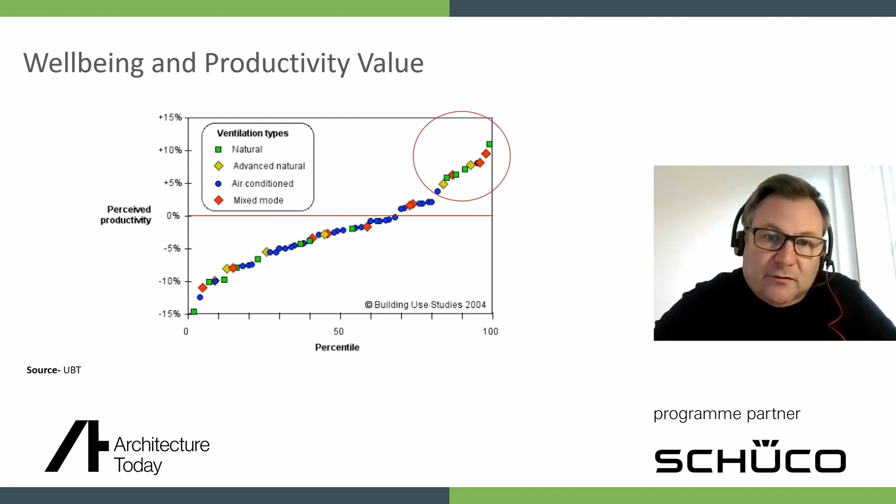So moving on to the next one, which is taking on the rental premium. There were 3 studies which came out last year which I think sum up the business model of many of our clients - they're looking at the capital cost increase versus what premium they would get for their building. And that's the crude calculation.

Now, what I'd really highlight is the higher figure is, I think, related to buildings where you throw a lot of technology at it, and we really highlight the risk of doing that. If we're talking about, for me, simple buildings carefully designed with an emphasis on passive design, and then perhaps a passive house plus approach, then I believe it's more towards the 8% capital cost increase, not the higher figure. So we've got to be careful how we take these figures.

But some of my colleagues, and in my own work at various firms, I always say to the client, I could actually achieve best performing buildings at no extra cost, and particularly practices like Architype have achieved that in many different sectors. The only thing that's kind of difficult is the added cost of significant renewables, especially ground source heat pumps or PV and things like that.